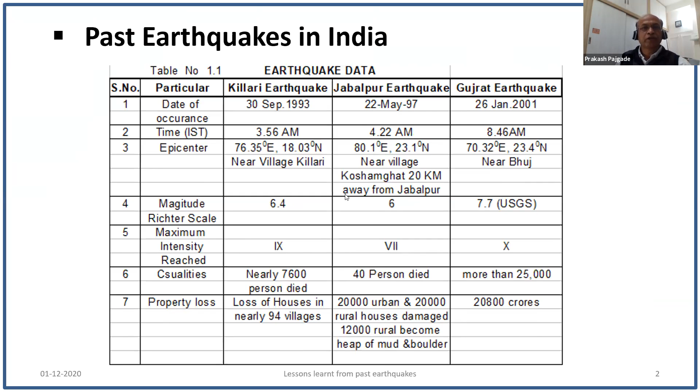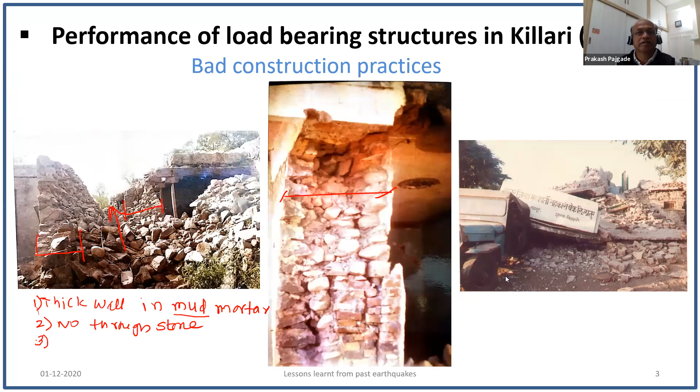Now this is another example from Jabalpur. It is the guest house, a two-story load-bearing guest house. In the front veranda, RCC columns were provided, but all other structure was load-bearing. If you observe minutely, you will understand that there was a door opening.

Adjacent to that door opening, a very small portion of wall, hardly 230 millimeter thick, and there was a large size cupboard. This is the outside view. The effect of the total shear will be maximum at the base, and that's why you can observe that relative to the first floor, on the ground floor the damage of the wall is more.

If you see the inside picture, then you can observe here only half brick wall was available because of the cupboard, and a very thin pillar was available, and this was the reason behind the cracking and damage of these particular load-bearing buildings.

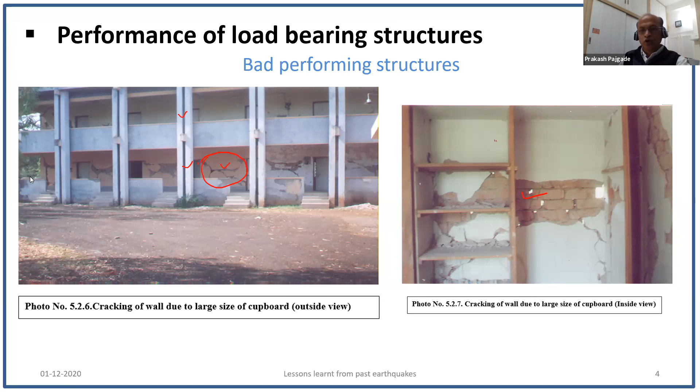Now we will try to understand the behavior. This is from earthquake tips. Now if you consider this wall and earthquake motion like this, horizontal earthquake motion, then we understand that because of overturning, on the right hand side tension will be developed, and on the left hand side compression will be developed due to moment.

If I take a plan of this wall, on the right hand side there will be tension, and on the left hand side there will be compression. So naturally the neutral axis will become vertical. If I consider dimension along the length as 1 meter or 1000 millimeter and this thickness as 230 millimeter, then moment of inertia about the neutral axis, as you already know, the dimension parallel to the neutral axis will be B and the other dimension will be D. So moment of inertia will be 230 into 1000 cube by 12.

For this wall, when moment is like this, the neutral axis will be vertical and moment of inertia will be 1000 into 230 cube by 12.

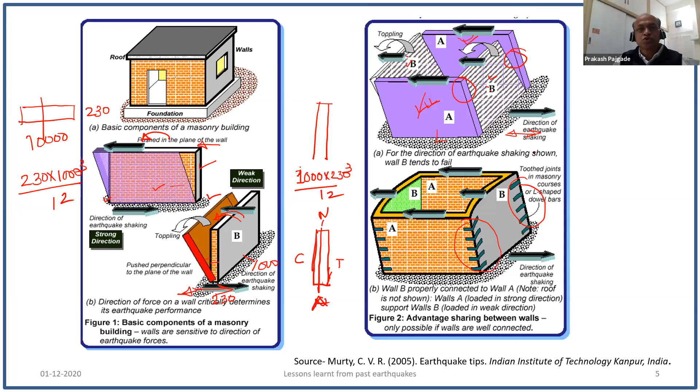We already know the earthquake may act in any direction. So if you consider the earthquake force in the other direction, then the role will be changed. If you consider the direction of earthquake motion like this, then this earlier weak wall will become the strong wall and this wall becomes the weak wall. But if they are properly connected, proper construction procedure is followed, then there will be proper transmission of forces from strong to weak, and they will help, and the ultimate behavior will be better.

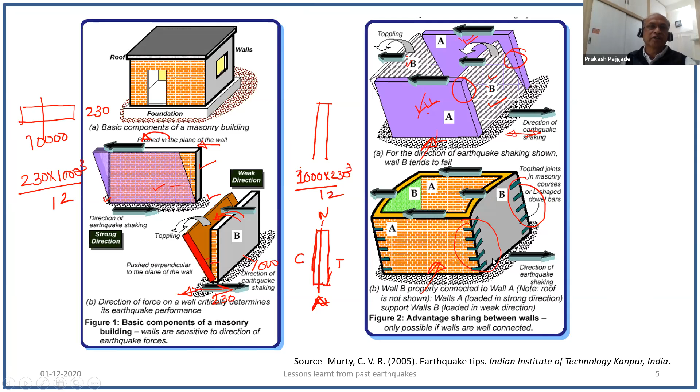So this is just for the 4 walls which are there. So this end portion or corner portion is most important.

But if we consider a room, then we must have openings for doors and windows. So if we provide doors in case of a load bearing building very close to the end, then naturally the load transmission, which is important at the corner portion, will be difficult. Same thing will happen in case of windows. If it is of very large size, then whatever strength we considered for the strong wall will be lost, and again this wall will also become a weak wall. That's why position of doors and windows is also important. So if you want proper box action, then the size of opening and position of opening is important.

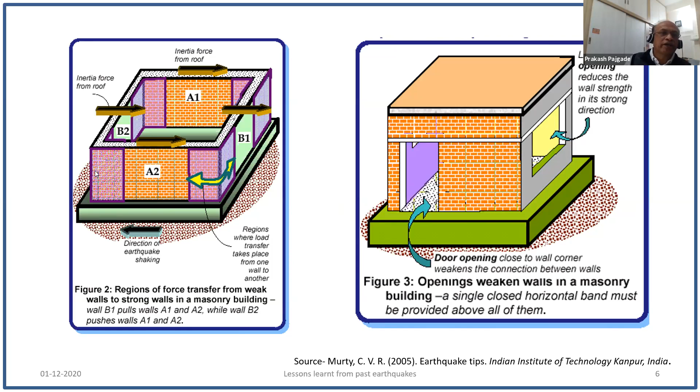Another point is, if we consider, say, this wall is 350 millimeter thick and this is 230 millimeter thick, naturally, if we consider the same height of wall, because of overturning moment, this thin wall will be more susceptible to overturning compared to the thick wall.

And in the second example, if we consider the same thickness, say 230 millimeter thick wall, and one is having some height, say 1.5 meter, and the second is 3 meter tall, and if you consider the overturning moment, then naturally this tall wall will have more overturning moment and chances of damage will be more. Of course, it will depend upon the overturning moment acting.

Now let's say this is the wall and earthquake force or inertia force is acting in the direction of the arrow. Now this wall will act like a slab element, and it will be subject to bending moment, and this cross wall will provide support. So if cross walls are placed at a very large distance, then the support provided by the cross wall will be negligible, and there are chances of failure of this long wall. So the spacing of support is also important, and that's why this is important.

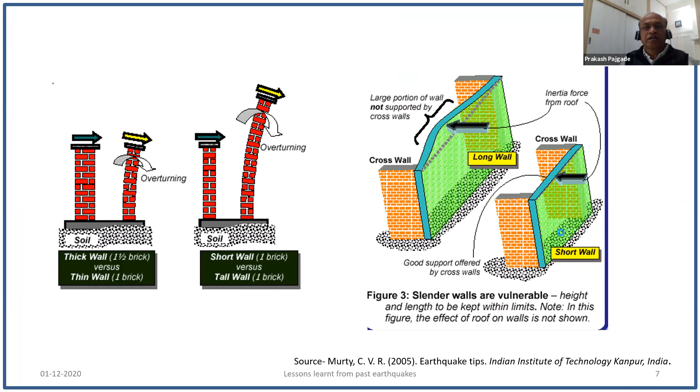Openings will be a weak portion, and we have seen that the connection between the two walls is important.

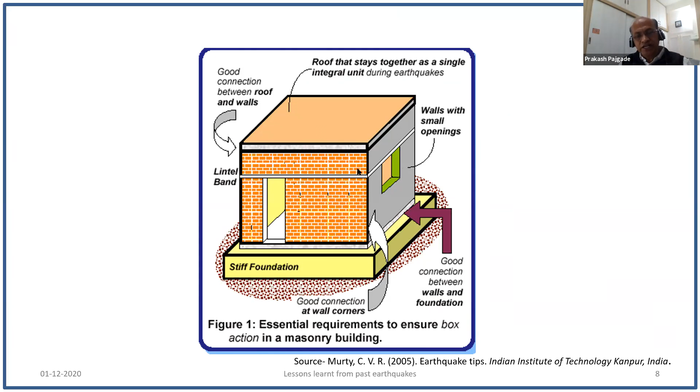We can add strength to the connection between the two walls by providing a lintel band. In case of a band, continuous reinforcement will be there, providing additional strength so these two walls will be properly connected. Because of the opening, some weakness will definitely be there, so a continuous lintel band instead of small local lintels will help connect these walls so that behavior during earthquake will be better.

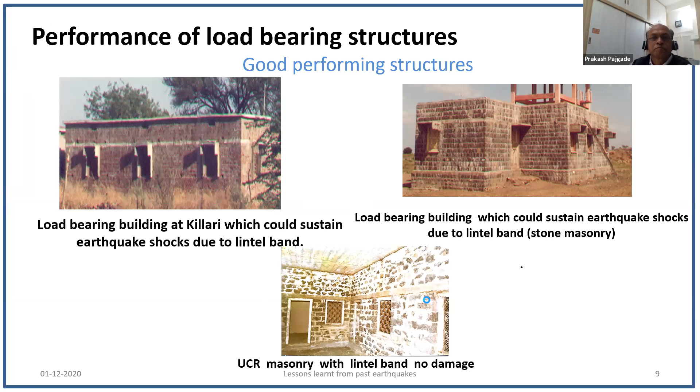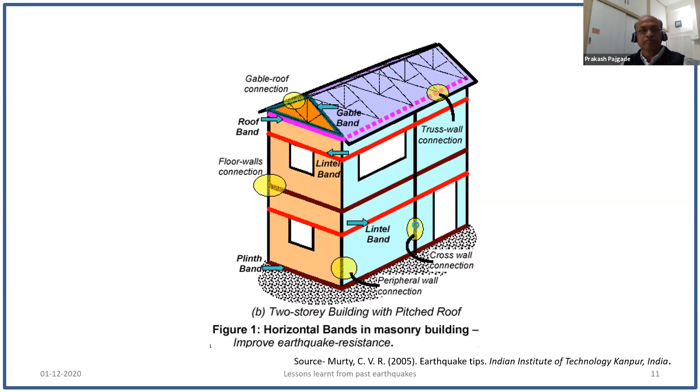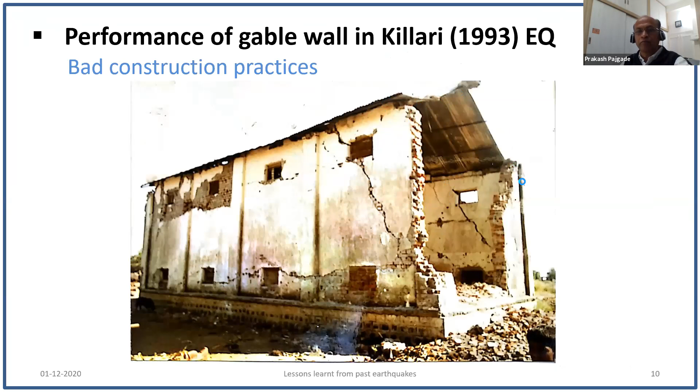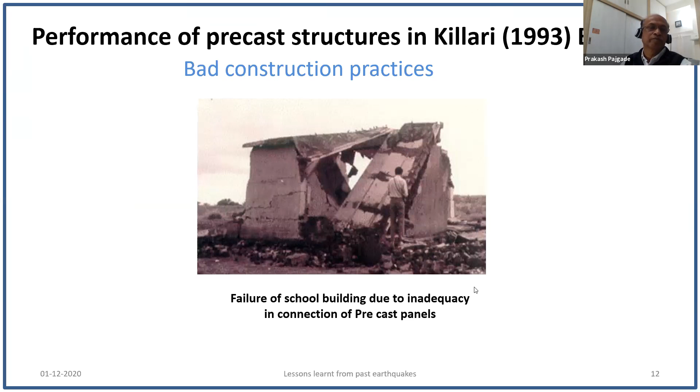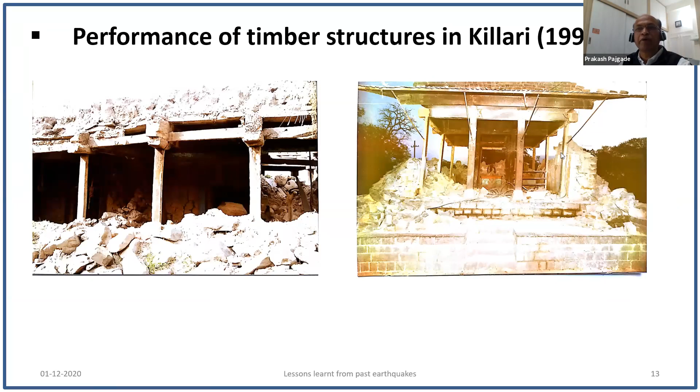But this timber frame structure was very strong, and at some locations because it was very good there was no damage. Of course these walls were problematic and fell down, and because of the impact of the wall, at some locations this wooden framework also failed.

Now, this thin wall, because of inertia forces, can be easily overturned. So we must take care of structural elements as well as non-structural elements also. Otherwise, there will be damage or overturning of non-structural walls.

In case of frame structure, nowadays the spacing of columns will be quite large, and we want to use very thin walls so that carpet area will be more. In such a situation, we must provide vertical and horizontal bands, and these bands must be connected to the main structural element so that we can prevent the overturning of these partition walls during earthquake. It is most important.

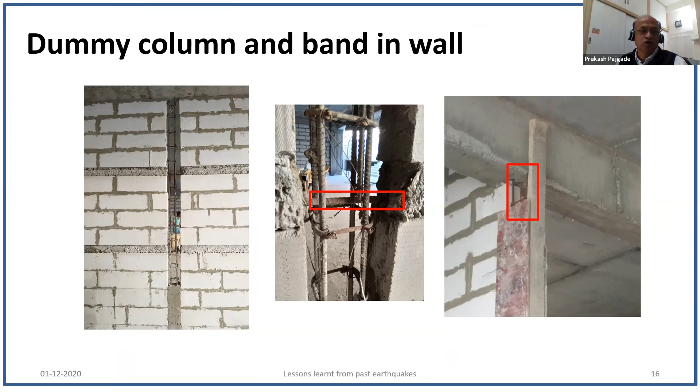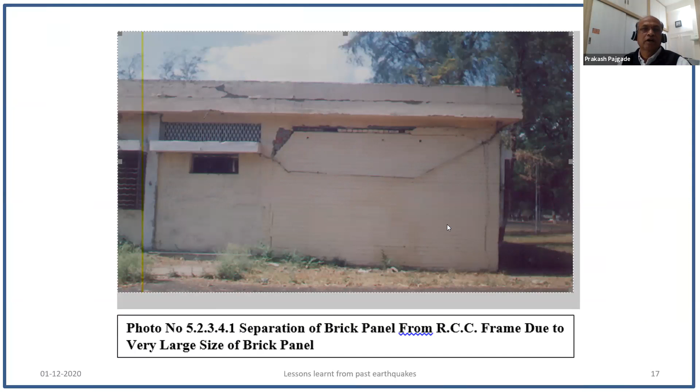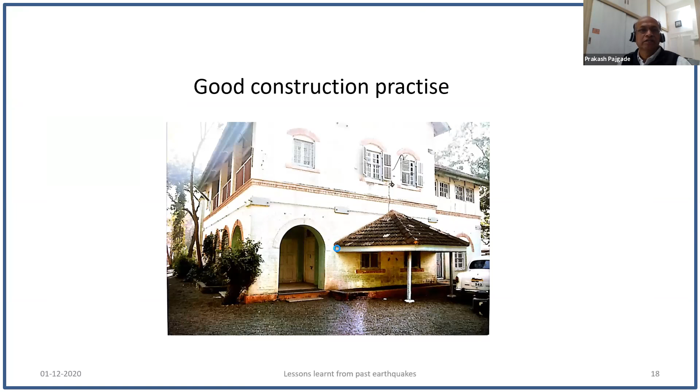I hope you must have seen the zoning map. Whenever we design, it will be designed for a certain intensity. For zone 2, the expected intensity might be 6. Sometimes definitely higher intensity is possible, because there is no guarantee that intensity will be less. It can be higher in the epicentral zone. The expected intensity in zone 3 will be 7, for zone 4 it is 8, and for zone 5 it is 9 and more. So these are the expected intensities for which we will have to design the buildings.

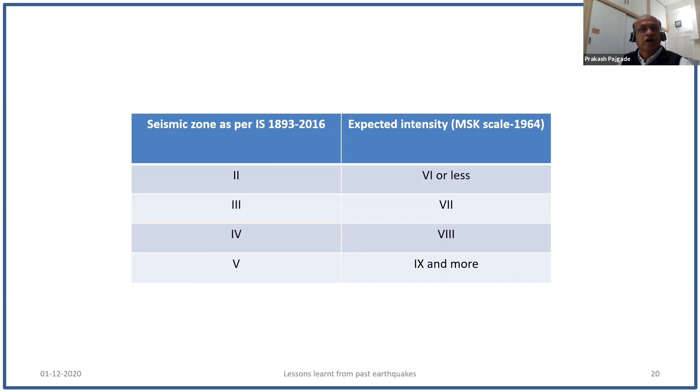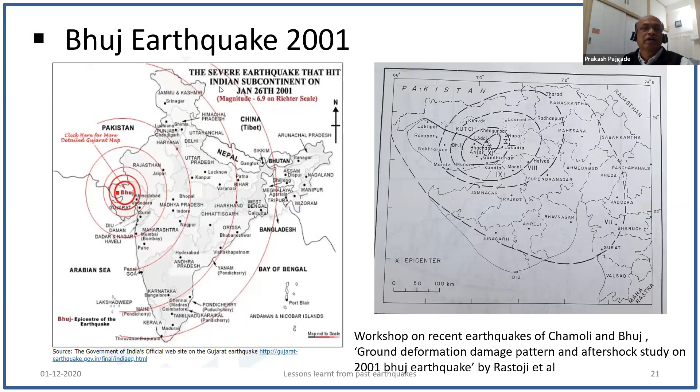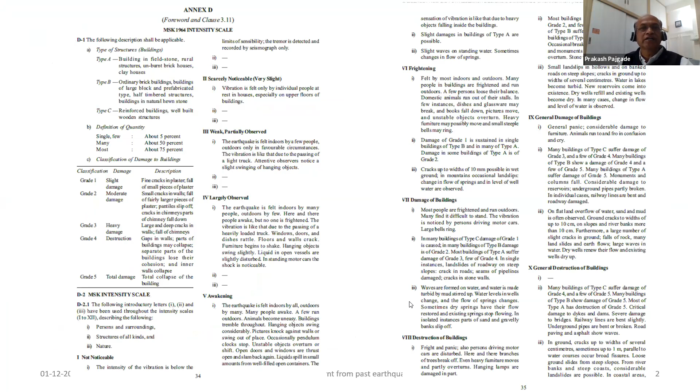Now in IS 1893, Annexure D, MSK intensity and its description is given, so we can understand the intensity, and after manual inspection this intensity will be decided and assigned.

So this slab will be very strong in its own plane because of very high stiffness. What will happen? This slab will act as a rigid body, and because of this it will provide uniform deformation to all members, and that is why earthquake forces will be transmitted along the members as per their stiffness. If a member is very stiff, it will carry more force; if a member has lesser stiffness, it will carry less force. The reason behind this is the rigid diaphragm, because this diaphragm will move like a rigid body.

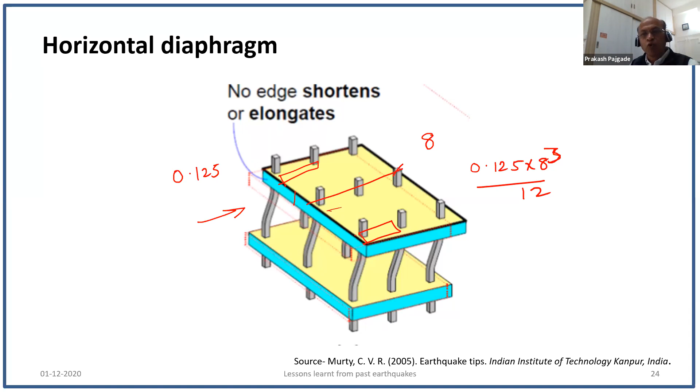We can see this. So it will move as a rigid body because it's a very stiff slab. This is the most important feature we must understand: the slab acts as a rigid body, and it will transfer forces according to the stiffness of the member. That is why it is expected that we must have only one diaphragm at slab level, and as far as possible it must be at the same level.

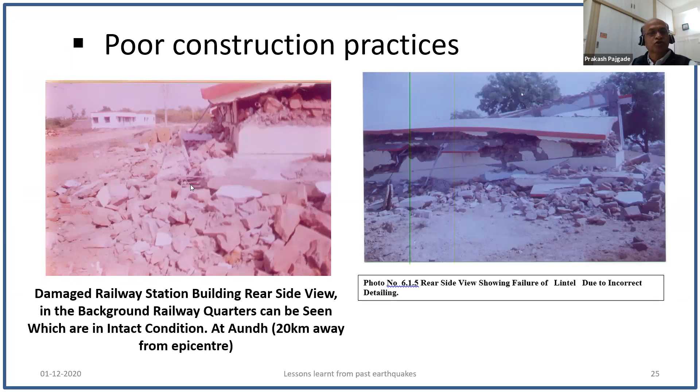Development length is most important. Suppose you consider a cantilever subjected to tension. The maximum force in the bar will be the stress level multiplied by the cross-sectional area, where phi is the diameter of the bar. So stress level into cross-sectional area gives the force in the bar.

Suppose this force must be developed, then there must be sufficient development length. There will be bond between reinforcement and concrete, and this bond stress is tau bd, developed because of contact, and contact area for this bar will be pi into phi, the circumference into the development length. If maximum stress is developed at the face of this cantilever, we know the force in the bar by this equation, and how much the bar must be embedded can be calculated using tau bd as bond stress and pi into phi into LD as the surface area.

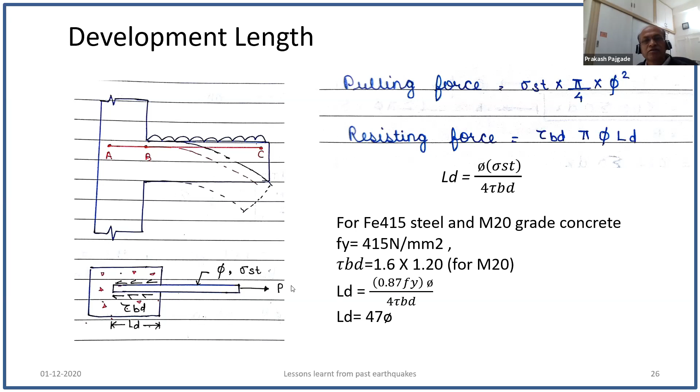So we can calculate development length; the equation is already given in the code. The value comes out to be 47 times the diameter for M20 and Fe415. If the force must be developed in the bar, then the bar must be embedded in the concrete from the point of maximum force for a length equal to the development length. Otherwise, even if you provide reinforcement, it will be of no use. This must be given proper attention.

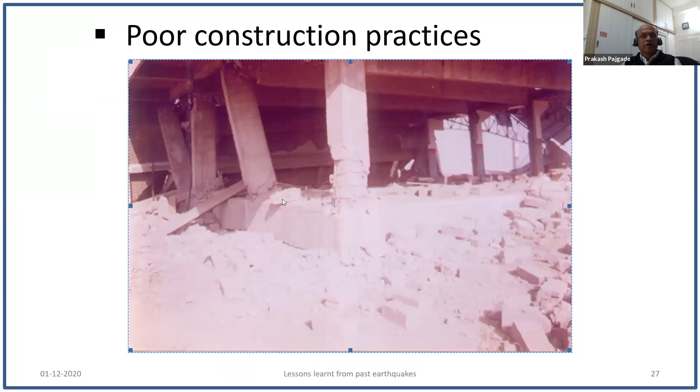This is the frame structure in Bhachau, which was the epicenter of the Gujarat earthquake. Only the ground story was constructed; it was under construction, but because of detailing problems you can see several issues. The columns were almost crushed at many locations. This is the joint junction at the plinth level.

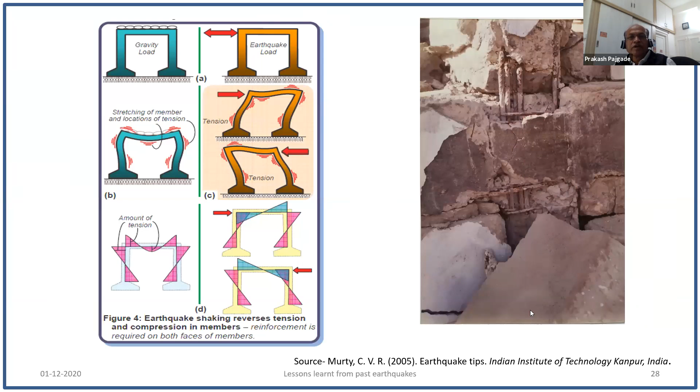Now this is the junction. You can see here the detailing: the cover is not sufficient, and the stirrups are also not closely spaced as required. And see here at this junction, the development length for top bar as well as bottom bar will be important from an earthquake point of view, because reversal of force will be there. There can be tension at the bottom face also, as we just saw.

Now you can see here development length provided for both bottom and top bars, and in this particular critical portion, there are no stirrups visible. The size of the column was very large, I think sufficient, but because of detailing there was damage. Now here you can see there is an opening of a link.

During earthquake, the cover concrete will spall, and if spalling of cover concrete occurs, there will be opening of the link if it is not properly anchored in the core concrete. If there is opening of the link, the main bar's unsupported length will become longer, and buckling failure of the reinforcing bar becomes possible. You will study this in ductile detailing.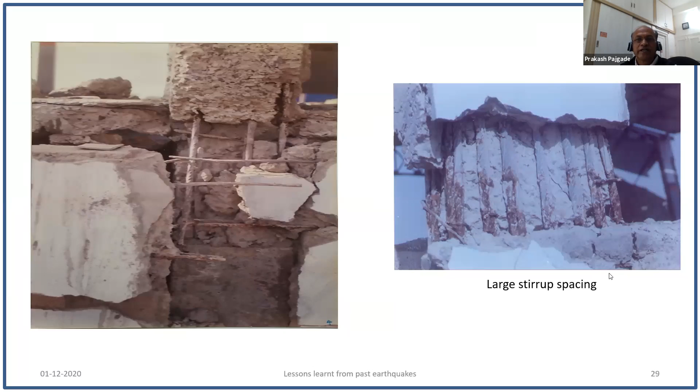We have seen that there will be spalling of the concrete, and then the cover concrete will be of no use. That's why the link must be anchored in the core concrete, inside the concrete. The diameter of the link and its spacing is important so we can have a confining effect. If you provide closely spaced links, the same concrete will give more strength.

If you remember the triaxial strength test in soil mechanics, increasing the lateral pressure increases the load the soil sample can take. The same thing happens if you provide closely spaced links: the strength of the same concrete becomes many-fold more. That's why closely spaced links are important.

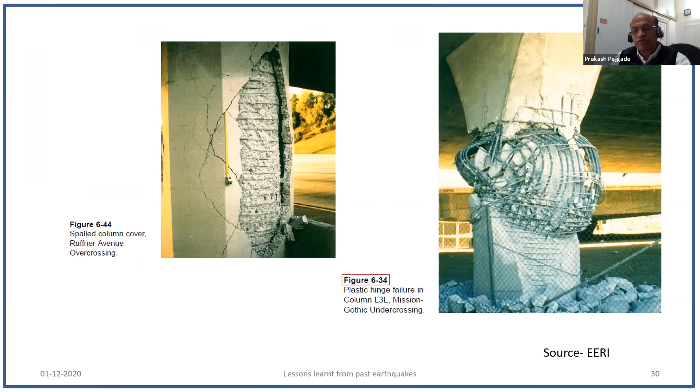The diameter of the link is also important. In this case, you can see the diameter of the link is not sufficient and proper anchoring was not there. Once links are lost, the effective length of individual bars becomes very long, and buckling of the bar becomes possible, leading to failure of the entire column—a chain reaction. So the diameter of the link and its anchoring is most important. This is a very small issue, but if it is not paid attention to, there will be problems.

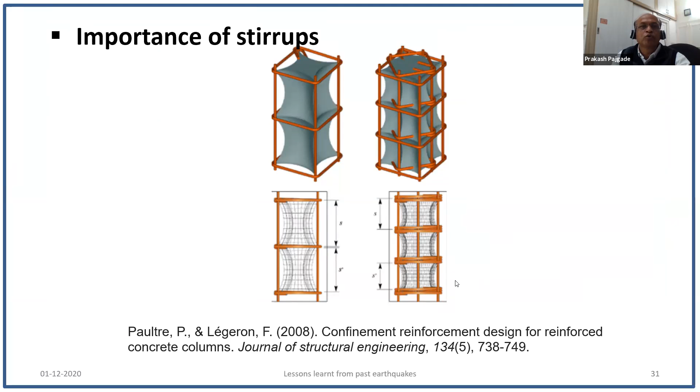See, this type of anchoring is expected in a core concrete. If it is provided parallel here, then just now we have seen that there will be spalling of concrete and opening of link. Then these bars will buckle because of loss of lateral support. So this type of anchoring is expected so that behavior will be better. And if you provide closely spaced links, definitely the confinement will be better and same concrete will give you more strength.

For the same railway station building, veranda column, they were of RCC. Now you can see here again, because of normal link, opening of link and then the crushing of the column. For veranda, dummy columns were provided, but it should have been properly anchored. These whatever bars which are there, the proper anchorage is expected. Because it was not provided, there was failure at the bottom as well as at top.

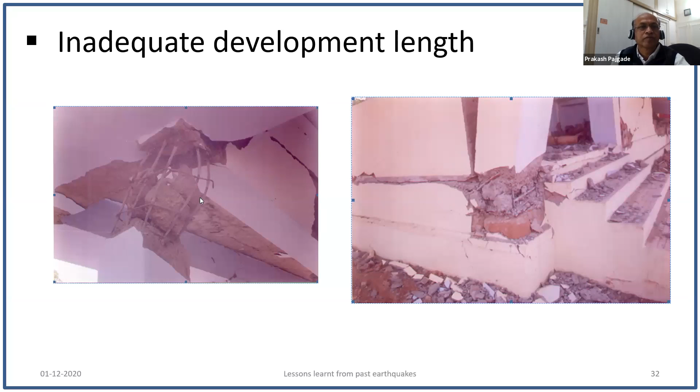Now in Gujarat earthquake, the buildings which were properly constructed, this is the load bearing building, double storied. Whatever good principles which are there, they were followed, and that's why there was no damage to this particular load bearing double storied building.

At one railway station, this is the railway quarter which was constructed. Railway station just 100 meter away from the railway station, this is the quarter. But because there was only slab at one level, proper lintel was provided, openings, proper openings were provided, locations and sizes etc, there was no damage. So you can see the difference. Just 100 meter apart, two buildings. If you follow the proper guideline, there will be no damage. If you do not follow, there will be total damage.

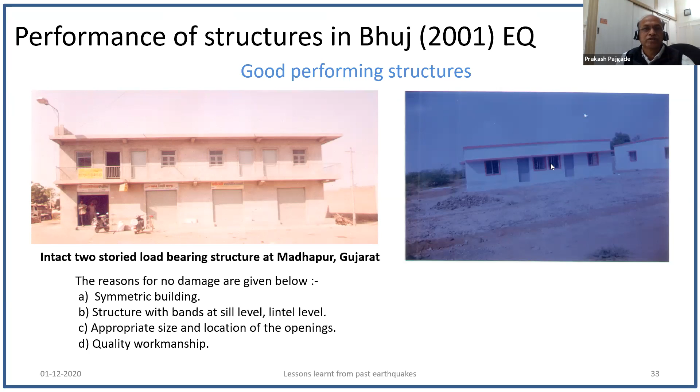This is another building, load-bearing building. Here you can see there was a large opening, and because of large opening, there was damage. Here lintel band, continuous lintel band, you can see this Bhuj area is in zone 5, and in zone 5, it is also expected that we must have vertical reinforcement at the corner, and some band must be provided at sill level also, so that performance will be better.

Because of lintel band, the building is in standing condition. Now, by providing vertical reinforcement and sill band, definitely the damage would have been minimal. Again, similar things, sill band is expected in zone 5 and also vertical reinforcement, same building, another view.

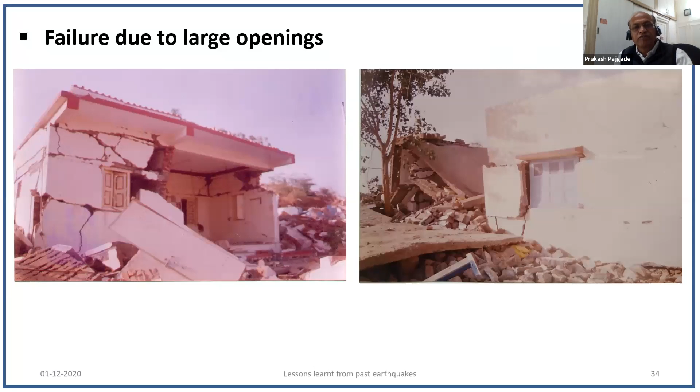But another important point which you must observe, this is at epicenter only, at Bhachau village. All other multi-storied buildings, frame structure, they collapsed. But this load-bearing building, because of lintel band, it is in standing condition. So whatever measures which are adopted, which are given in the code, if we follow that, then the performance will be definitely better, because these are the live examples.

Now there are guidelines given. This is the manual for earthquake resistant non-engineered construction, published by ISET. All precautionary measures, what should be the size of brick pillar required adjacent to the door, window, all things are given, so that building will have better response in the earthquake.

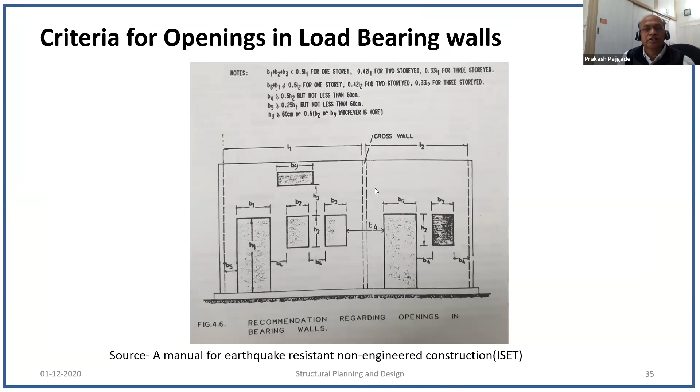Now another important thing is the short column effect. This is important. If we consider normal strength of material principle, then we will not be able to solve the earthquake problem. Now I will show you, let's say this is a building with 3 multiplied by 4, 12 columns are there. Now from theory of structure, we know that if height of column is L, the stiffness of column against lateral deformation is 12EI upon L cube. If length is L, we will have stiffness of column 12EI upon L cube.

Now there is another column where this height is, instead of L, it is L by 3. So we can calculate its stiffness. We'll have to replace this L by L by 3. So what will be stiffness of column with a height equal to L by 3? This L by 3 cube. So it will come at the top, and stiffness of this column with a height equal to L by 3 will be 27 times that of this long column. If it is a long column, it will be flexible, but if it is a short one, and if height is 1/3 of this column, it will be 27 times stronger.

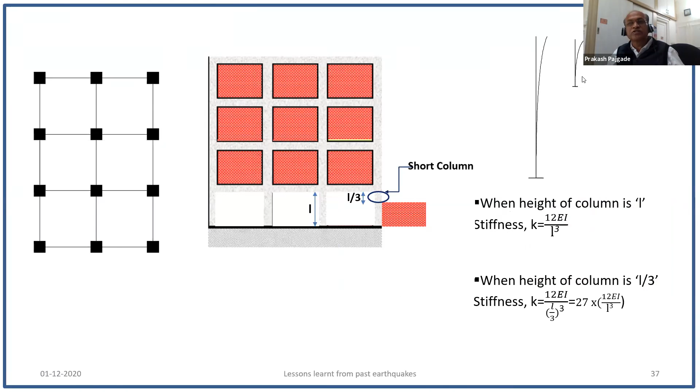Now in the same photograph, you can see the damage here. There are columns, and these are brick pillars supporting the gates. Let's see again - there are 12 columns. Actually the length was the same, but because of the unwanted support of masonry, this one column has become short, and its stiffness is 27 times more because of the calculation we have seen.

Suppose we consider this situation, and if the earthquake force is 1000 kilonewton, and there are 12 columns of equal length, then stiffness will be the same, and the horizontal force carried by each column will be 1000 divided by 12, that is 83.33 kilonewton taken by one individual column.

But if unwanted support is provided, what will happen? This column will become very stiff. We have seen that the stiffness of this column will be 27 times more than the others. So if you consider total stiffness, it will be 11 for the other columns of length L, and for this one column it will be 27K. So total stiffness will be 38, and the force taken by one column will be 26.32.

For a column of height equal to L, the force taken will be 26.32. And what will be the force taken by this stiff column? It will be 27 times this, so 710 kilonewton. So out of 1000 kilonewton horizontal shear force acting during the earthquake, the force taken by this single column will be 710.

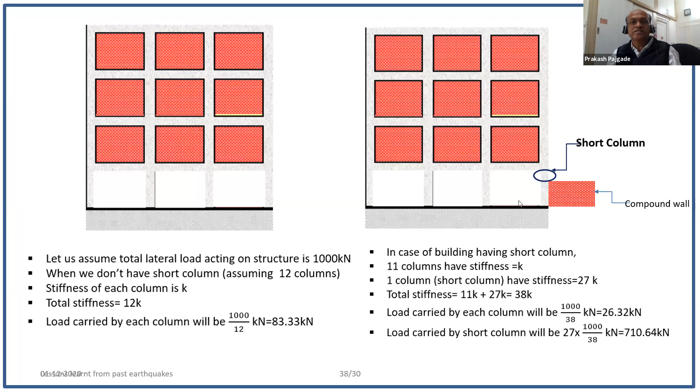And this will definitely be more than its capacity, and that is the reason behind the failure of the short column. No doubt, from strength of materials principle, a short column is very strong. But because it is very strong, it attracts large forces.

The forces will not be transmitted as per tributary area, they will be transferred as per stiffness, because the slab acts as a rigid diaphragm, and because of this rigid diaphragm, forces are transferred according to stiffness. So this column has become very stiff and attracted very large force, but its shear capacity was not sufficient, and this led to the failure of this single column because of the short column effect.

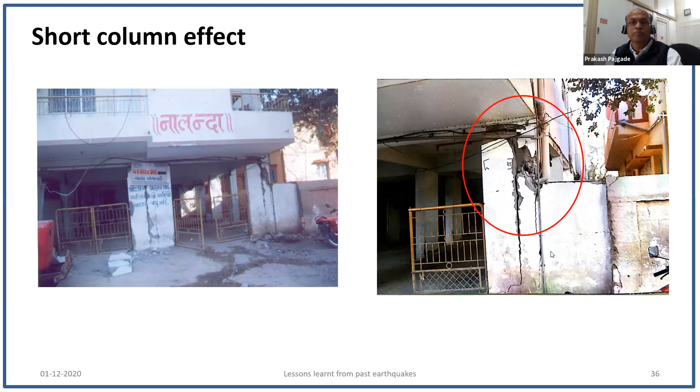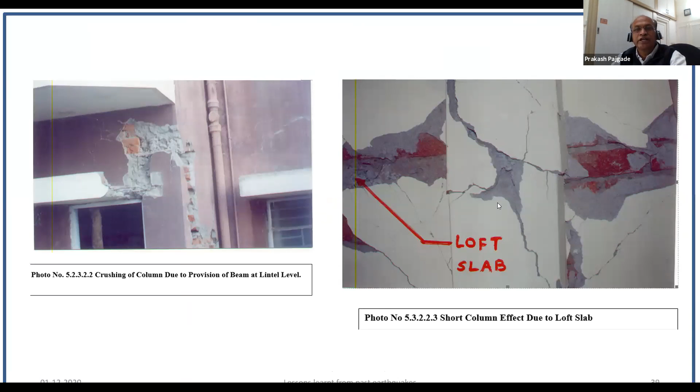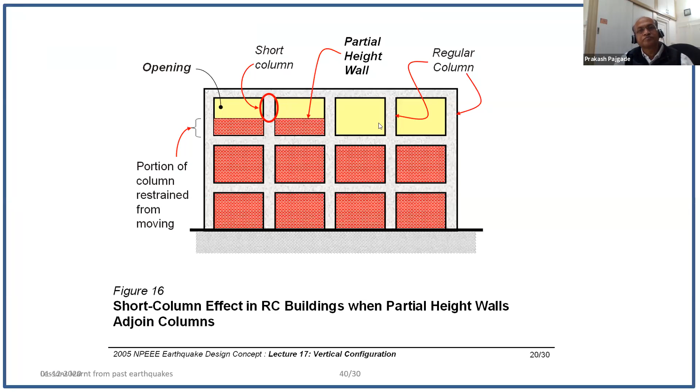Now there are a number of situations where short columns are possible. Even if in a building we provide a loft slab, that will lead to some short column effect. Sometimes brick walls are provided for a panel up to some small height, and this makes the adjacent column a short column, attracting large forces. These are mezzanine floors provided. Now if it's a building on sloping ground, these columns will attract more force even if the size is the same.

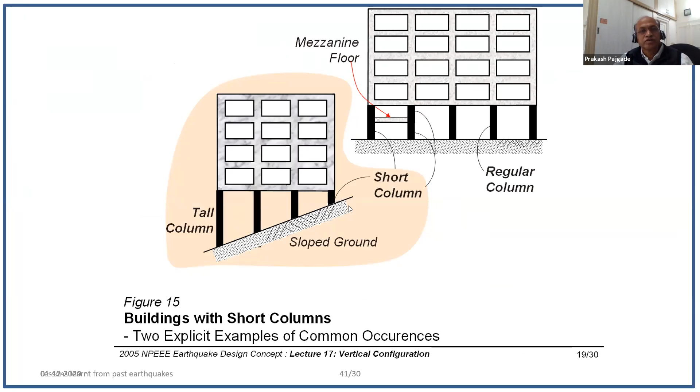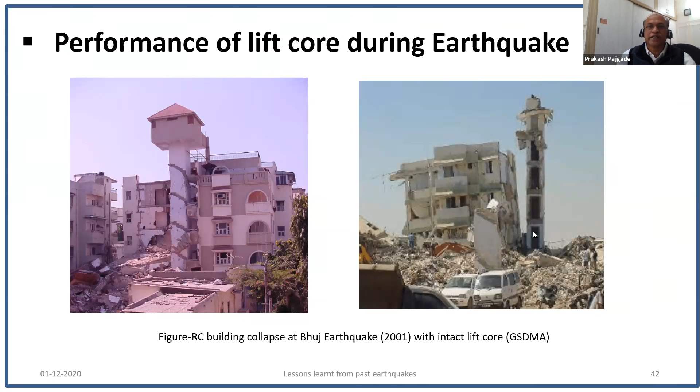The same, another building where the lift core is standing, but the other building has totally collapsed. Now many times, instead of providing an RCC wall, columns are provided and then brickwork is added for the lift. Let's see some calculation.

Instead of 4 columns and wall, if you provide an RCC wall minimum 0.15 meter thick, and consider the earthquake direction horizontal like this, then the moment of inertia of this wall will be 0.15 into 1.8 cube by 12. This is the moment of inertia of this single wall. Instead of this, there are 2 columns.

If you provide 2 columns, the moment of inertia of the 2 columns will be 2 into 0.23 into 0.35 cube by 12. So if you provide one wall of 0.15 by 1.8 meter, the moment of inertia will be this value, and if you provide 2 columns, the moment of inertia will be this other value. If you calculate the ratio of moment of inertia of wall to column, it is 44.35.

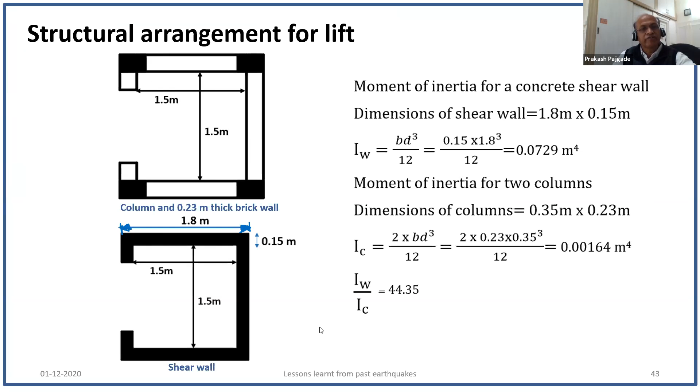This small RCC wall, which will act as a shear wall, will be around 45 times stronger than this RCC column of 230 by 350 millimeter. That's why whenever possible, we must go for RCC shear wall, at least in a core portion, so it will be very strong for this portion as well as the entire wall and entire building, because a rigid diaphragm slab transfers load according to stiffness. This is a very stiff member, so most earthquake forces will be taken by this wall, helping resist the forces.

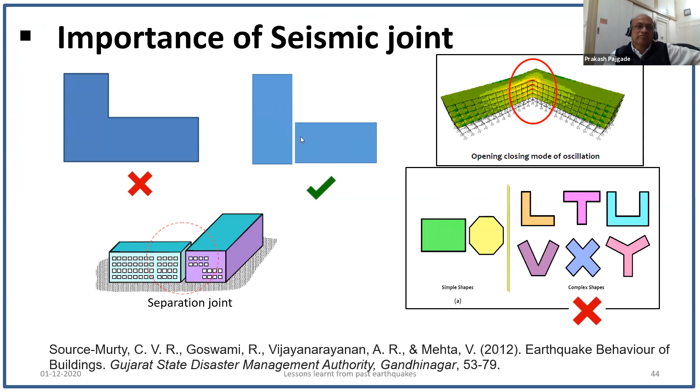Then there are some other features. If you provide an L-shaped building, torsion will develop, and that's why these are not expected. If you want that shape, you can provide individual blocks so you can have the purpose while the building acts as an individual building. At the corner there will be stress concentration, and that's why L shape is not expected. This shows buildings damaged because of L shape.

Whenever two adjacent buildings are there, if the gap is not sufficient, these buildings will vibrate in different modes and may bang into each other, so sufficient gap is expected. Otherwise, because of impact, there will be damage.

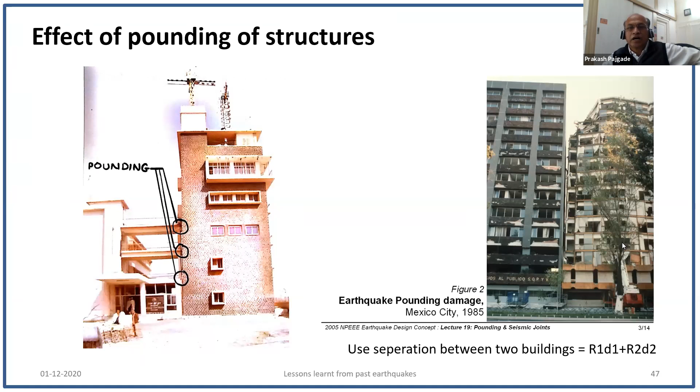The most important thing is we must have very strong columns. But the structures provided in our area, or in India generally, are weak column and strong beam - the columns are not given importance at all. We must have very strong columns and weak beams.

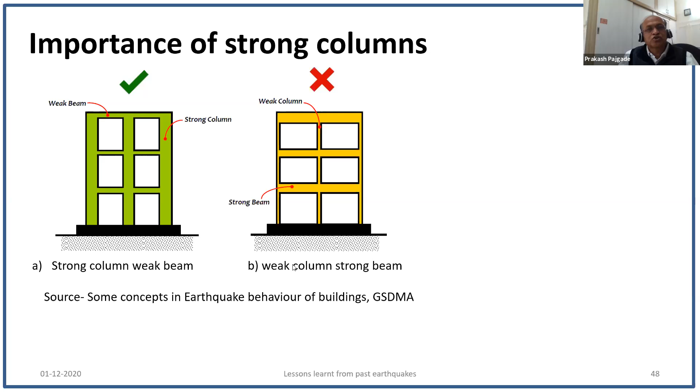These are examples from the Gujarat earthquake. For a 10-storied building, the column size provided was hardly 230 by 450 millimeter, and the footing size was almost 1.6 by 1.8, which is not sufficient for dead load and live load conditions. This is Shikhar Tower, and this is the main reason behind the failure - there was violation of codal provisions.

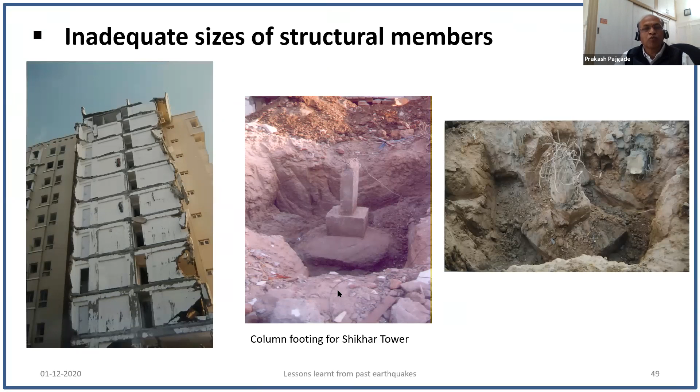This is a hostel building at Kandla port. This is not the ground story, it is the first floor - all columns on the ground floor were crushed because of the soft story effect, and that's why this first floor looks like a ground floor.

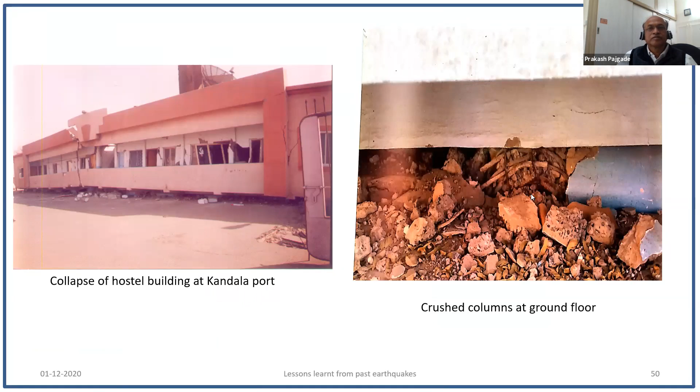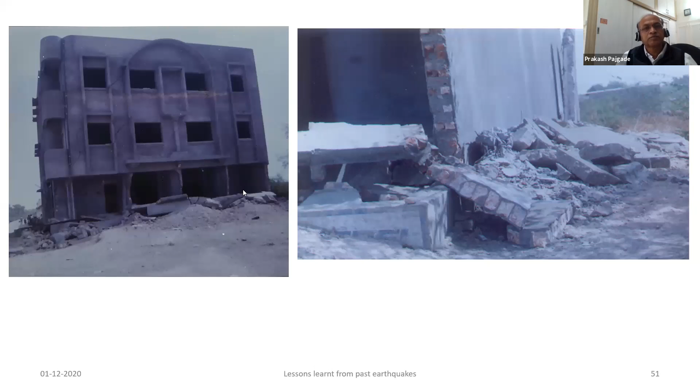Similarly, where shops were there, there was failure of the ground floor - you can see the column, and this building has fallen by one story. This is from the Jabalpur earthquake. For parking, where there are no walls, some additional precautionary measures are required. If these measures are not taken, this type of failure will occur.

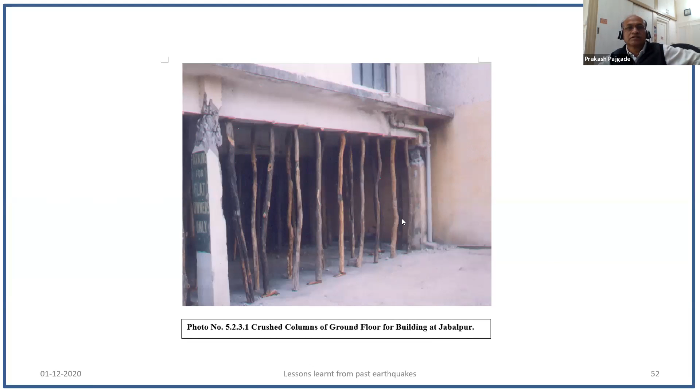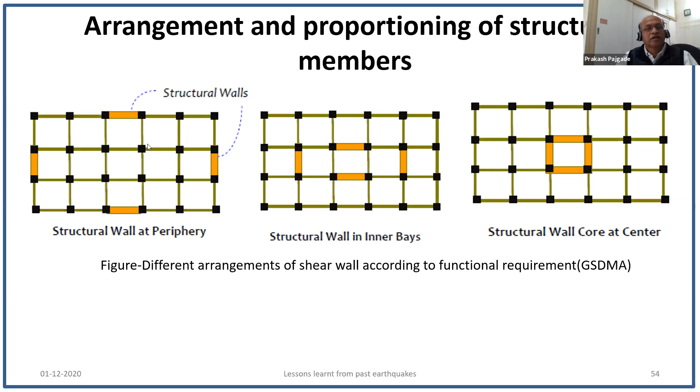Another important thing is the arrangement of structural elements. If you arrange the structural elements properly, the response will be very good. If not arranged properly, the response of the structure will be very bad. So proper structural walls and columns must be provided - that is most important, and symmetrical arrangement of structural members is also important.

At the top level - because a building acts as a cantilever fixed at the ground and free at the top - if you vibrate from the bottom, there will be large vibration at the top level. This is called the amplification effect. So structures provided on top of the main structure, such as staircase towers, will experience more earthquake force - this is called the appendage effect. Amplification of ground motion will occur, and these parapets or staircase towers at the top must be designed for 5 times the seismic force.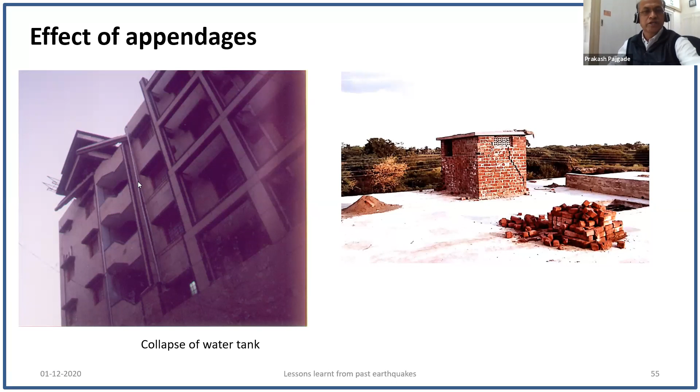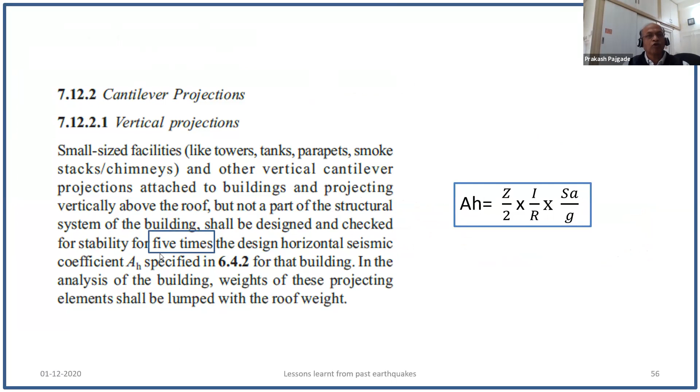For vertical projections, the code specifies we must design for 5 times the earthquake force. This is from the Jabalpur earthquake. The parapet must be properly connected to the main structural elements such as the slab, and if it is a frame structure, the column must be projected and this wall must be properly connected.

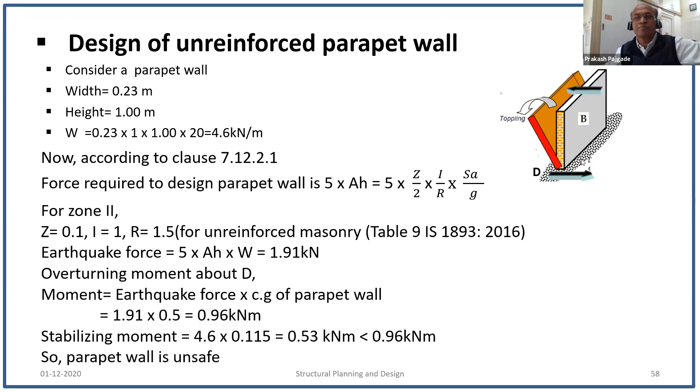So here I have shown you a calculation. If 1 meter length of wall is there and height is 1 meter, we can calculate its dead load, and earthquake force can be calculated. It is 5 times the... we'll have to consider for appendages, and we can calculate this, I will provide you this presentation. So overturning moment is very large compared to stabilizing moments, and that's why these parapets are not safe. They must be properly tied to the slabs and other elements, otherwise these walls will be overturned, as you can see here. So importance of main structural elements is there, as well as importance of non-structural elements. Even a single brick will be sufficient for killing a person if it is falling from a height. That's why structural and non-structural elements are most important.

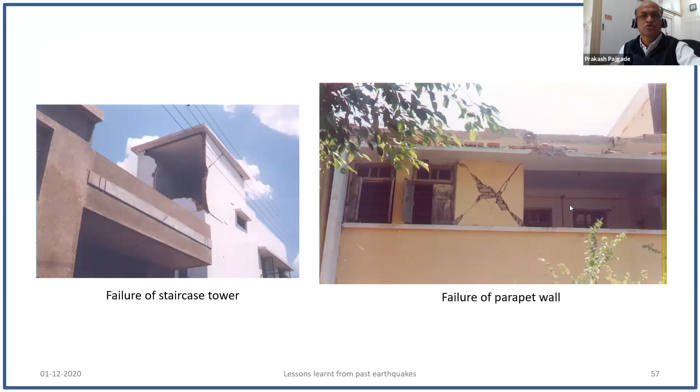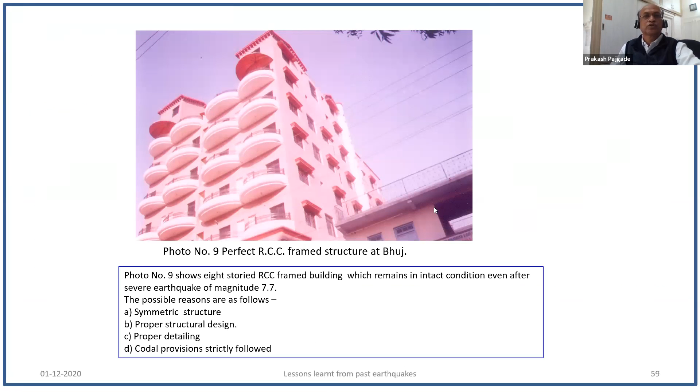So this is a building from the same Gujarat earthquake. It was properly constructed, so there was no damage to this building. Thank you very much.